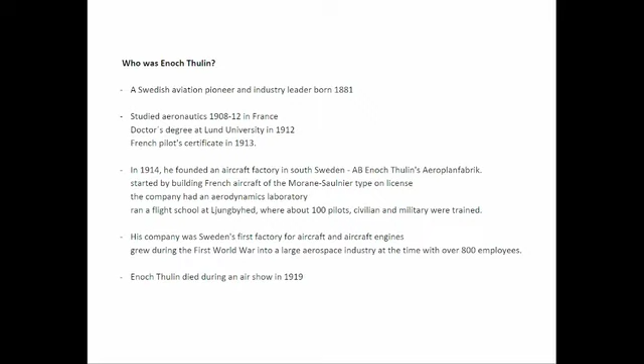And after some time, his company had about 800 employees. But then he died during an air show in 1919, and the war was over, and there was no demand for his aircraft, so his company went bankrupt very soon.

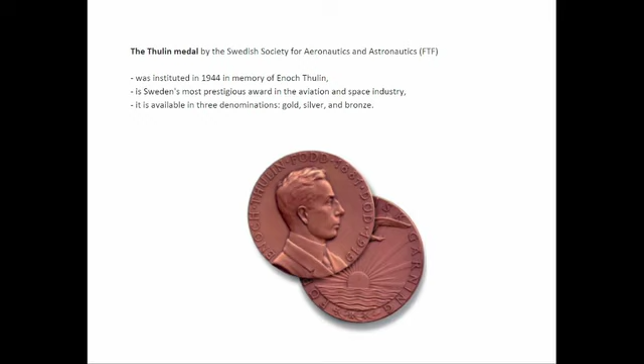But to his memory, we have the Thulin Medal by the Swedish Society of Aeronautics and Astronautics, and this medal was instituted in 1944, and it's the most prestigious award for aviation and space in Sweden. And it's available in 3 denominations: gold, silver, and bronze. So then you have the background about Enoch Thulin and why this lecture was named in his honor. Thank you.

So the ICAS Award for Innovation in Aeronautics 2022 is awarded to Professor Eli Livne from the United States of America for seminal contributions to the theory and practice of Aero-servo-elasticity in the context of aircraft multidisciplinary design optimization, and for pioneering work towards the maturation of aircraft active flutter suppression technology.

So let me tell you a little bit about Professor Livne. He is the Boeing Endowed Professor of Aeronautics and Astronautics at the William E. Boeing Department of Aeronautics and Astronautics at the University of Washington in the United States. Professor Livne holds a BSc from 1974 and an MSc from 1982 in aeronautical engineering from the Technion Israel Institute of Technology, and a PhD from 1990 in aerospace engineering from the University of California, Los Angeles.

After obtaining his undergraduate degrees, he served in the Israeli Air Force in research and development roles. And after graduating from UCLA, Professor Livne joined the faculty of the William E. Boeing Department of Aeronautics and Astronautics in 1990.

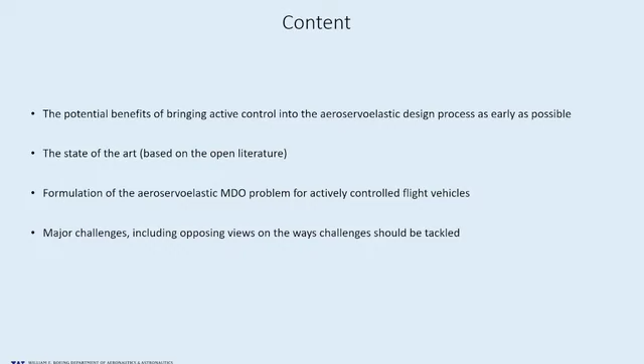So what is the goal of this talk? I want to try to convince you that it is important to bring active control to the early stages of airplane design — that while it is difficult, it is feasible, it is doable. I want to briefly talk about the state of the art, since this can be viewed as a bit of an esoteric area. I'll insert one or two short tutorials into the presentation to make sure we're all on the same page. I want to formulate the multidisciplinary design optimization problem with aeroelastic control in a general way that hopefully will serve other people developing this technology. And I'm not going to hide from you that there are some debates and disagreements about how we should proceed. So, a very short tutorial about engineering optimization.

We think about any system as a set of systems that can be parameterized and described by mathematical models. These mathematical models have parameters which determine what these systems are about, and as designers, we play with these parameters to get the systems we want. In the case of a structure, for instance, even if the material is already selected and the shape is given, we can still ask ourselves what is going to be the best structure — maybe the minimum weight or minimum cost structure that will meet all design requirements with the safety that we need. That's really the essence of the problem.

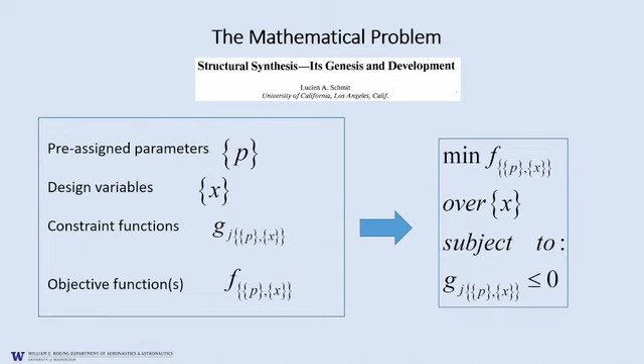Following Lucien Schmit's terminology — I have a little picture here from one of his papers about the history of structural optimization — the parameters that define these systems we're designing can be split into two: pre-assigned parameters, which we don't touch during optimization, and design variables, which we do play with. All the constraints and requirements are described by mathematical functions of these parameters — stresses in elements, buckling loads, flutter parameters, aerodynamic parameters — everything the system does can be described as some function of these design variables. We put them in a list of constraint functions that tell us what we can and cannot do to get feasible designs. Then there's the objective function: what are we trying to minimize or maximize — cost, performance? On the right is the mathematical formulation: minimize some objective function of the design variables and pre-assigned parameters over the set of possible feasible design variables, meeting all the constraint functions mentioned.

Structural optimization is about optimizing structures. You ask yourself, what is the best structure I can build that will minimize weight, minimize cost, maybe maximize reliability, subject to all the stress constraints, maybe natural frequency constraints, maybe fatigue constraints — all those limits that ensure the structure is safe.

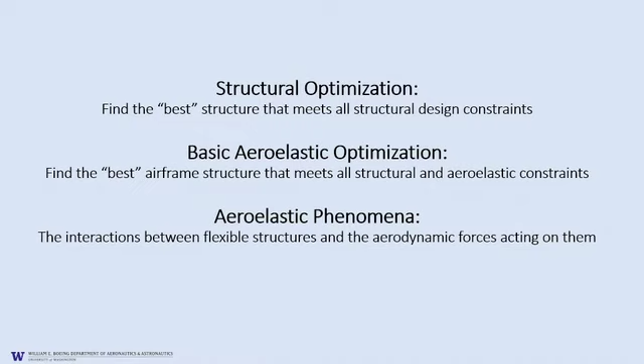Extending this to aeroelasticity - the field where structures and aerodynamic forces interact when structures are flexible and determine the forces acting on them. Now we have a problem where if we focus on the structure, we want to design a structure of minimum weight or minimum cost that will meet constraints on all the stresses and buckling loads, but also on some aeroelastic measures, such as flutter behavior, efficiency of ailerons, and things like that.

How would the pilots feel about them? How would the control system manage to work with them? So this is all the field of handling qualities. All this can be described mathematically.

Maneuver loads - these airplanes maneuver, and so you want to make sure that in all possible maneuvers, nothing fails. All the parts are within the stress limits, within the buckling limits, within the frequency limits.

Flutter is an aeroelastic instability, where as the speed or dynamic pressure go up, a kind of feedback loop can lead to unstable behavior. I'll show you an example of this in a few minutes, so I don't want to talk too much about it now.

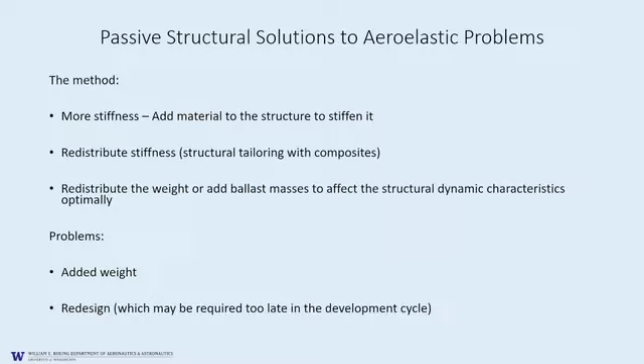If you can use composites, then maybe you don't add weight, but you can play with the fiber direction, so you can tailor the stiffness and control the stiffness distribution. You can decide to move masses, place the engines here, place the engines there. If you have no choice, you will add ballast masses, in order to solve dynamic problems. All this has been used for years, was used for years.

The problem with this is that in almost all cases, this would add significant weight to the airplane. Not to mention cases where you think you've done everything right, and now you have the prototype, and you already invested $7 billion in developing it, and something was missed, and you have an aeroelastic problem - what are you going to do? Redesign the wings, redesign the structure. So usually the penalties here will be very, very heavy when you use the passive approach.

So I would say in the 70s, definitely the early 80s, it was clear that structural optimization should be expanded to cover aeroelastic optimization. Some great airplanes of the past were designed using structural optimization with aeroelastic constraints - the X-29 forward swept wing with composites, the F-16, the Rockwell X-31. It was clear that this was the way to go.

Industry, unfortunately, does not share with us enough of what they are doing, so it's not so easy to know what the capabilities are at different companies. Lucky for us, actually, Dassault in France managed to share with us quite a bit. They were pioneers in developing aeroelastic optimization techniques going back to the 70s. Christian Petiau, a real genius of an aeroelastic designer, developed and led the development of a code named Elfini.

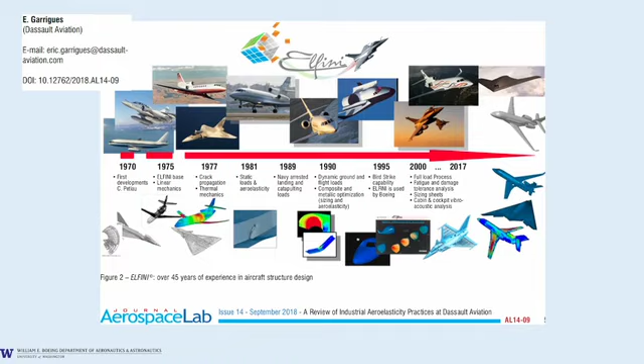So these capabilities are existent. Now, optimization has not been only attractive for structural and aeroelastic designers. Control system theorists and control system practitioners knew that it was important for them to design best control systems. You just go to Amazon and search for books on optimal control, and here you are. So the fact that you can design a control system not just to do the job, but to do the job in some best way, covering constraints and other design requirements, was very well known, and the technology is quite mature.

So it was natural to ask if we could add active control to aeroelastic systems in order to improve them. In this figure, on the bottom two blocks in blue, you can see how the flexible structure interacts with the aerodynamics in a kind of feedback loop. You apply forces, the structure deforms, the deformation changes the aerodynamic loads, this feeds back, and that can lead to all these aeroelastic problems.

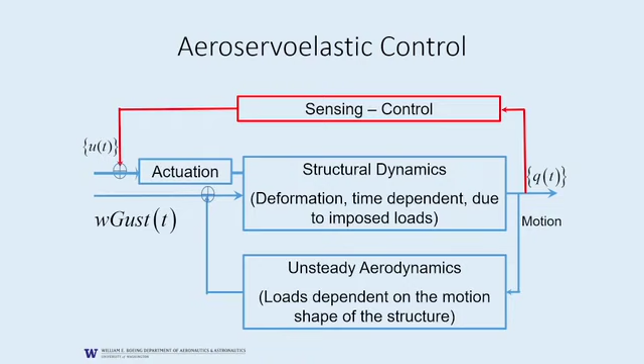And on top in red, the structure is moving in space, it's deforming. Let's place some sensors, accelerometers, strain gauges, and use the signals from these sensors that tell us what they are doing, in order to feed a controls computer that then would set commands to the actuators that would move control surfaces, and this way affect the total behavior.

So in the area of active control of aeroelastic systems, first you think of maneuver load control. Here the idea is that you will design your airplane structurally for, let's say, cruise conditions. You can see here in the broken line the perfect distribution of loads on the wing. Of course, you worry about the bending moments along the wing because that will determine the weight of the structure that you will need. But if the airplane maneuvers, pulls some G's, turns...

...these bending moments will go up unless you use the control surfaces to redistribute the load. So you can see here in the solid line how, as the airplane maneuvers, the control surfaces go up or down, and the whole distribution will change in order to keep the loads within limits so that you don't have to add the weight.

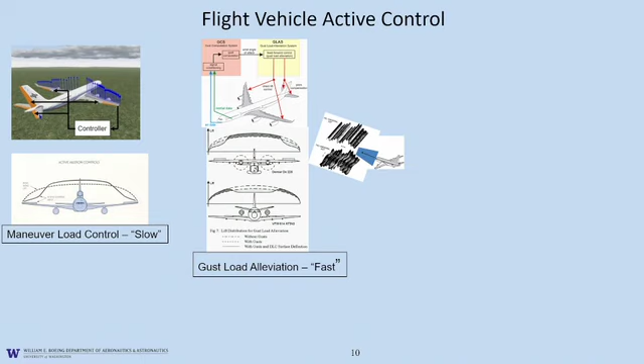As I said, we all flew through gusts. This is a daily experience for anybody who flies flexible airplanes: you hit bumpy air, and they jump, and if you look out of the windows, you see the engines moving and the wings flexing, and everybody gets very scared, except that when you know how safe they are, you shouldn't be scared. I get scared, even though I know this is safe. It helps my kids when I tell them that, but even knowing how to design them, I still get scared sometimes when the airplane shakes too much in flight.

So here again, if you have an active control system, as the airplane begins to shake, the control surfaces can move dynamically based on some control law in order to reduce this level of shaking and control the dynamic stresses and the levels of vibration. And here is ride comfort.

Well, we think about passengers in airplanes, but this is also a military problem. There's this famous story of the B-1 bomber. It was designed as a supersonic bomber for a typical mission of going very high into enemy territory and delivering its ordnance. But with the development of advanced radar systems, the mission changed, and the airplane was now required to fly at treetops, using terrain following. Imagine a heavy bomber like this, very flexible, very slender, flying in canyons and over hilltops, really shaken by very turbulent air. The crews couldn't sustain it, couldn't stand the levels of vibration. So North American Rockwell at the time, now all Boeing, installed these little two control surfaces in the front, little vanes, and with the active control system suppressed the vibrations.

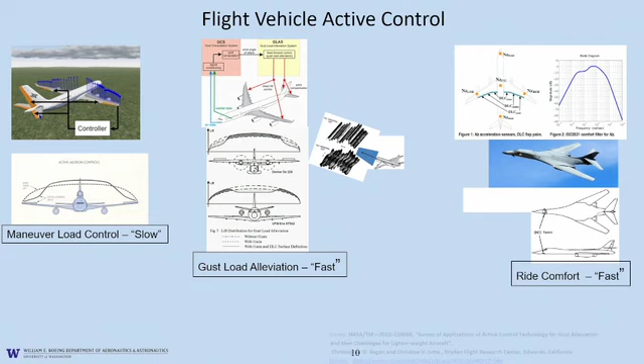I talked about the flutter problem. As I said, this is an instability. The airplane begins to fly faster and faster. That feedback you saw, as the airplane deforms in a dynamic way, changes the aerodynamic forces. The aerodynamic forces then feed back and change the load on the airplane. If you're not careful, if not designed properly, you will get unstable oscillations that can destroy an airplane in a fraction of a second.

This is a famous story from the 80s. NASA developed a special drone for aeroelastic research. It was called DAST, D-A-S-T, for Drones for Aerodynamic and Structural Testing. They had an active control system, and all the great people of the time designed control laws.

Lo and behold, in one of the tests, there was a miscommunication between people, and they programmed the wrong control law into this drone. They realized this was the case and started to slow it down, but it was too late. On inertia, the airplane was accelerating.

If you look at the figure in the center, I apologize, I imagined a screen where I'd be able to use a laser pointer. I did not imagine such a huge screen, so I will direct you just by telling you what to focus on in the slide. When you look at the center, look at the bottom, you will see the Mach number going up with time.

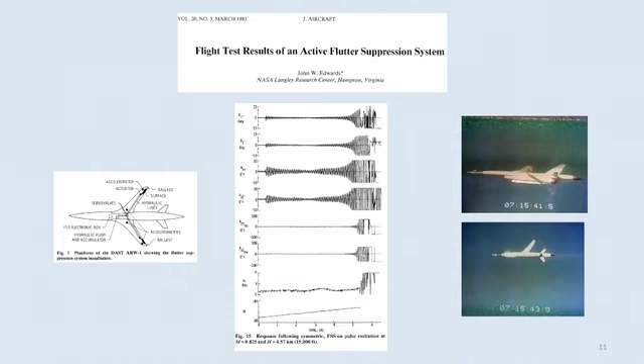As the Mach number goes up, the airplane becomes unstable. The control system tries to do something, but it's too late, and the airplane breaks into pieces in a fraction of a second. So it is a very dangerous phenomenon, and you cannot allow any airplane to ever encounter this kind of phenomenon.

The passive solution here will be stiffness and the correct mass distribution, but maybe we can use active control instead. Maybe we can control or program the control surfaces to respond to motions in a stabilizing way so that we don't have to add all the weight to the system.

So here is the story. First, you can see the flexible airplane, the deformable airplane in flight. It is driven by inputs. These inputs come from pilot commands to the actuators and from gusts in the atmosphere. It responds by moving, and it's moving around as what we call a rigid body, and it's also flexing in flight. You have a set of sensors that measure this deformation.

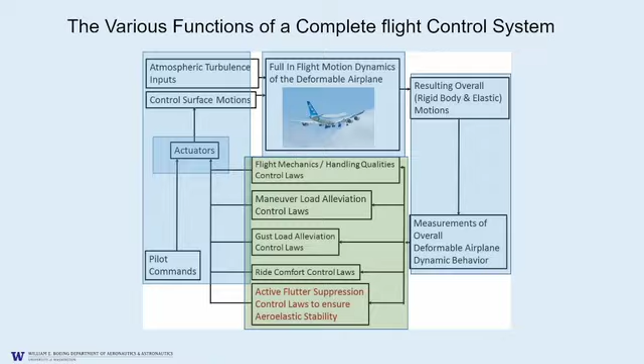They feed this information to a bunch of control laws on a controls computer, and these control computers send inputs to the actuators to close the loop and create a system that, using active control, will meet all these requirements on flutter stability, dynamic loads, ride comfort, fatigue, and so on, without having to add substantial weight to the structure.

This was already envisioned in the early 50s, but the technology was not there to do it. Late in the 60s, the US Air Force gave Boeing Wichita, when Boeing was still in Wichita, a contract to test it on a B-52 bomber.

So Boeing took a B-52 and modified it by adding control surfaces. I'm not going to go into the detail, but just looking at the figure, you can get some sense of the heavy instrumentation of these airplanes. It was equipped with more control surfaces, more sensors, controls computers.

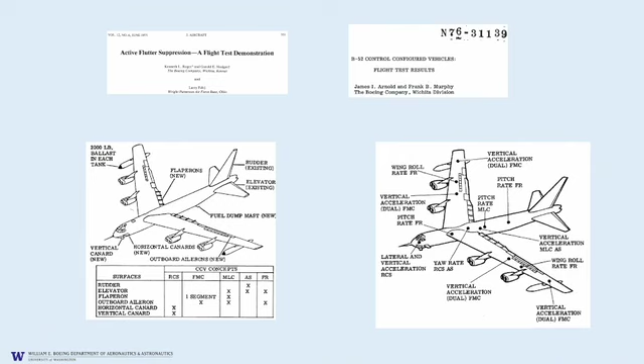What they also did, they deliberately lowered the flutter speed of the airplane. These fuel tanks that you see near the tip of the wings, they installed heavy ballast masses at the nose and deliberately made the airplane flutter at very low speeds. The goal was then to fly it beyond the flutter speed on active control and see how everything worked.

This is, I don't know if you want to call it the beauty of the beast, a phenomenal machine, very complicated, done in the early 70s. You can see in the nose area some of the added control surfaces. Boeing demonstrated that indeed the airplane could fly on active control beyond the flutter speed, meeting design requirements, just all using active control.

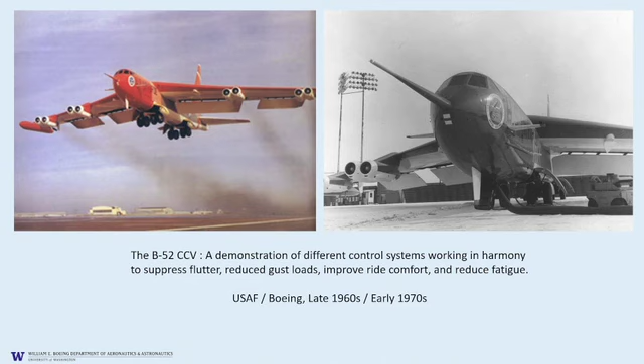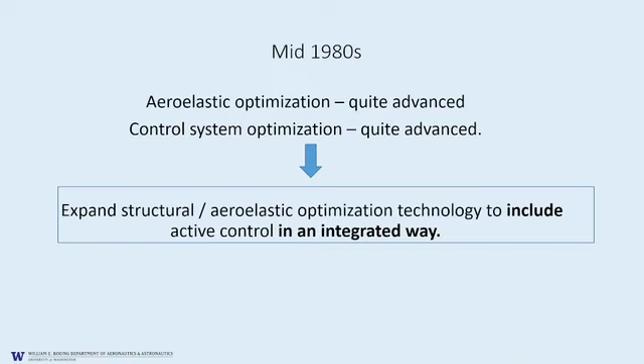So by the mid-1980s, where we were, aeroelastic optimization was quite advanced, not where it is today, but quite advanced. Of course, control system optimization was quite advanced too. So it was natural to ask, when we design an airplane, what if we integrated everything? What if instead of doing the structure separately and the control system separately, we would integrate everything into one optimization problem where everything will play together?

Before we talk about what was done in the 80s, I want to add a few notes. So far, I talked about the problem in a very analytical way. The control laws were some block diagrams, some mathematical expressions, and we talked about computers and structures. But it's not so simple. When you add a control system to an airplane, you add substantial complexity to the system. There's no free lunch in the world.

There's no free lunch in aeronautics. So we can control the airplane using a control system, but what is the price of the control system? These actuators, these computers, these data buses, all these hydraulic lines and the reservoirs, all this means weight and cost.

Without going into much detail, just to give you an impression, what you can see on the left is the architecture of the control system of the B-2 bomber. This is a quad system. Basically, there are four systems designed so that when one or two of them fail, the other ones will take over. So you will have quadruple capability in terms of actuators, computers, and things like that. That's heavy, that's complicated, that needs maintenance.

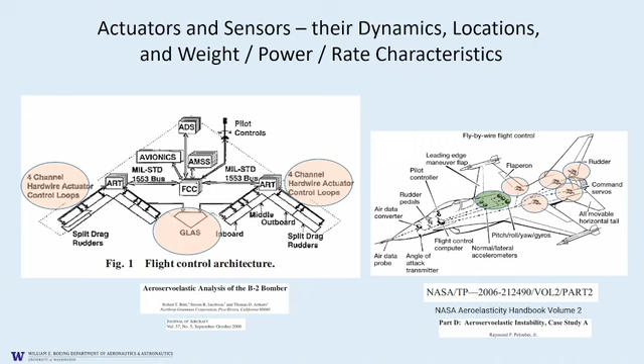The other very important question is the question of mathematical accuracy. The optimization process is a mathematical process. Every time we change the design, we have mathematical models that will tell us what happens. How do the stresses change? What is the flutter speed going to be? We have to have accurate mathematical models for the optimization process to make sense. Otherwise we'll get nonsense, and we are talking about very complex systems.

You have to capture by analysis the structural behavior, the structural dynamic behavior, the steady and unsteady aerodynamic behavior, and of course the behavior of the actuation system and the sensing system. This is not an easy job, even today.

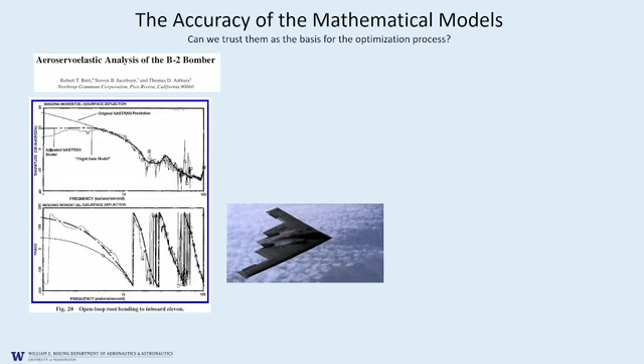Here is an example from the B-2. It's true this was done some years ago, but if you look at these diagrams on the left you can see a frequency response. This is what happens when you use the elevons to affect the bending moment of the B-2, and you change the frequency. In the low range of the frequency, the broken line is the original analytical prediction, which was completely off. Flight tests showed that they had a big error there, and they had to go back and fine-tune their mathematical models. If this were to be used for optimization, the optimization process would not lead you to the correct result.

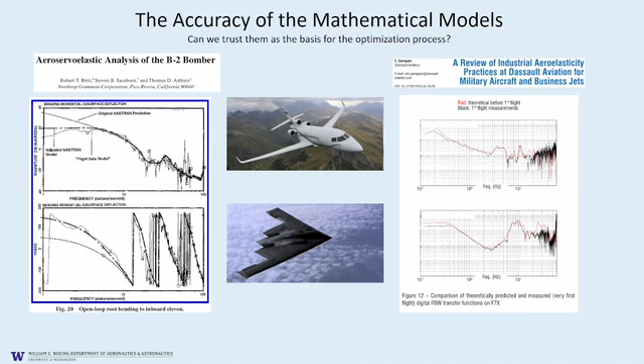So the accuracy of a mathematical model for real airplanes, and I'm talking real airplanes, not academic cases, simple cases which are all nice and lead to many papers in the journals. I'm talking about what it would take to really affect the design process in industry. You must have accurate modeling in order to do meaningful optimization.

As it happens, things kind of congealed and popped up almost simultaneously in three places. One was Terry Weisshaar at Purdue with a student, Tom Zeiler, in collaboration with NASA Langley Aeroelasticity Branch, Jerry Newsom there. They wrote a very nice paper on the idea that it was time to integrate control and aeroelastic design. But their paper was really a concept paper, and they demonstrated it using a very basic, simple example. But when you talk about doing it with mathematical capabilities that would allow you to design real airplanes, it happens in two places almost simultaneously.

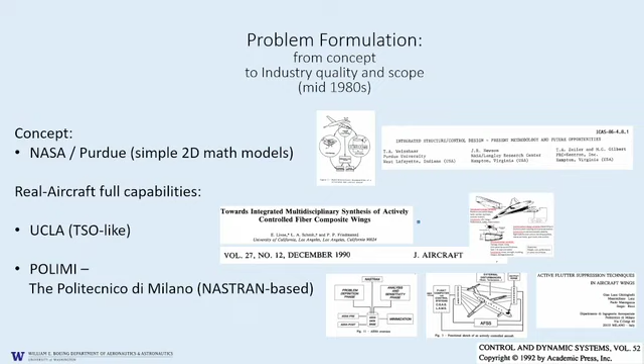At UCLA in the mid-1980s, and at the Polytechnic of Milan at about the same time. We didn't know about each other's work. I was working at UCLA with Lucian Schmit and Peretz Friedmann. I came from the Israeli Air Force. I had a lot of experience. I worked with the most advanced airplanes of the time, the F-16s and the relaxed static stability systems, the F-15s, the advanced F-4s. So I saw a lot of these aero-servo-elastic problems in practice, and I had some ideas on what should be done.

And in Milano, the great Paolo Mantegazza, with a phenomenal team of students, developed a similar capability, with some differences. What we did at UCLA in the structures area used some approximate models for wing structures that were good for fighter jets or supersonic jets, but not so good for high aspect ratio subsonic passenger airplanes. Paolo Mantegazza and his team did it right.

They used Nastran, they used finite elements. Great students, one of them, Sergio Ricci, who's here—talking about people I'm indebted to. It's been so nice to have known him since his PhD days, when we worked on the same thing, and now we're collaborating on other projects of active flutter suppression.

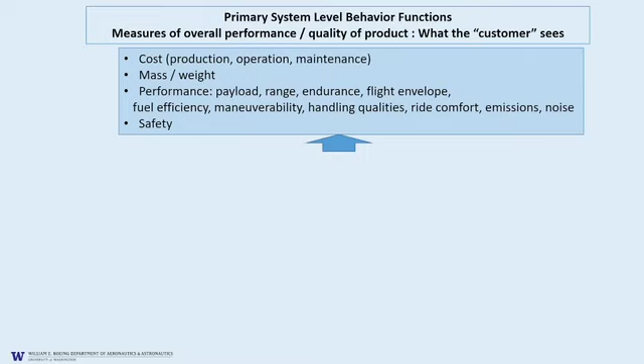So as a customer, you go buy an airplane—what do you care about? What behaviors do you care about? You care about the cost, the weight, certain performance. It's a fighter jet, you want it to perform in a certain way. You care about safety. That's what you care about. This is the highest level, where customers talk to manufacturers about the airplanes they want.

But below that, there are behavior functions—I call them secondary, but they're not less important. You have to design the airplane so these behavior functions will be under control. First, in the structure area, every part of the structure has to have stresses, in every maneuver and every load, within limits. You may have constraints on the level of twist and deformation, and on the frequencies.

Customers—say a company like Delta goes to Boeing to buy airplanes—they don't say, 'show me that this bolt in this part of the wing has a stress level below this threshold.' They really don't care about it, but the designer must care about it.

In the aerodynamic area, we care about lift and drag, any nonlinearity, buffet, and hinge moments, because the moments on the control surface determine the actuators. Again, a customer won't say the airplane must have hinge moment below a certain number, but the designer must tackle this.

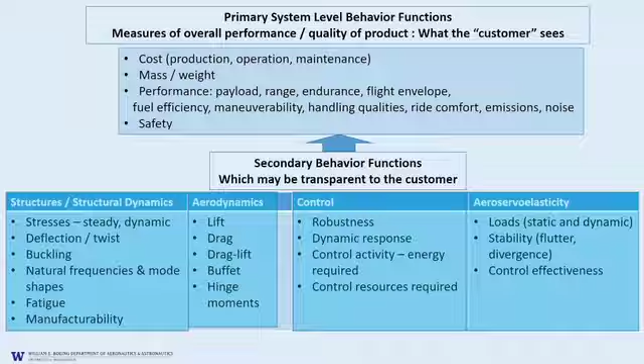In controls, similar story—we care about the robustness of the system, how it deals with uncertain situations, and the dynamic response it gives us. In aero-servo-elasticity—servo referring to controls, the traditional technical term for control mechanisms—we care about dynamic loads, flutter, and control effectiveness of the structure. So these are the behaviors that determine the constraints and the objective of the design.

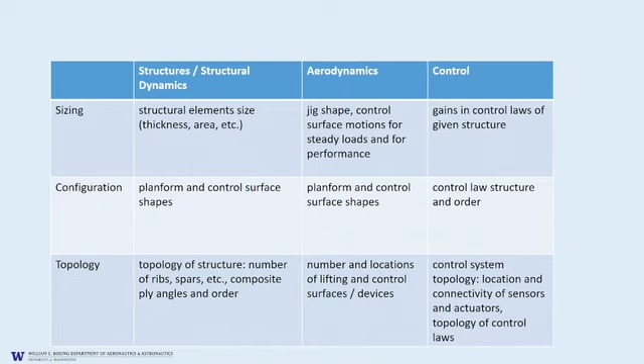On the design variable side, we have design variables coming from structures, aerodynamics, and controls, at three levels according to their complexity. At the lowest level are sizing-type design variables. So if we talk about structures... let's see, yes, it works, great—I'm very happy this PowerPoint presentation does work.

At the lowest level, you have a structure with a shape, everything connected in a particular way—you want all elements to have correct thicknesses and areas so stresses stay within limits. Going up in hierarchy, you allow the shape to change: given the loads, maybe the structure would take a different shape than you started with. At an even higher level of complexity, you have topology, where you not only play with shape and sizing but also with how elements connect points in the structure.

Much, much more difficult—same in aerodynamics. You can start with a given aerodynamic shape, but change what's called the jig shape, how you'd build it so it deforms in flight to the correct configuration. You can go higher and higher in hierarchy to play with the full shape of the airplane, and similarly for controls.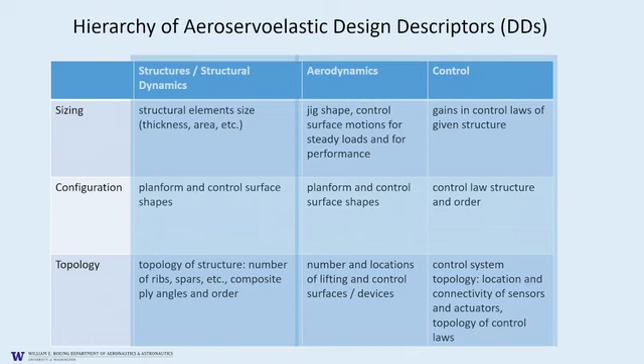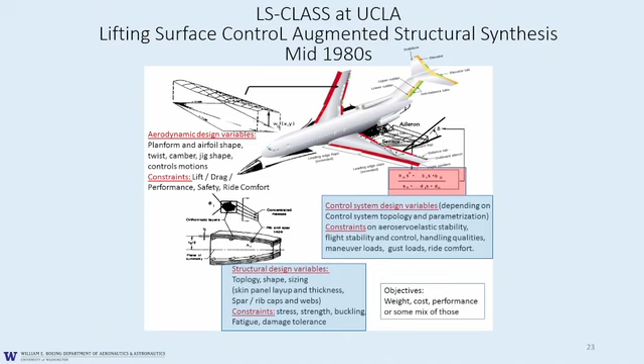So at UCLA, we created a code that could handle design variables of the sizing type. It could play with composite layers of the wing and tailor them. It could play with control laws by adjusting the coefficients of transfer functions of the control laws. And it could play with the aerodynamics by designing the jig shape of the airplane.

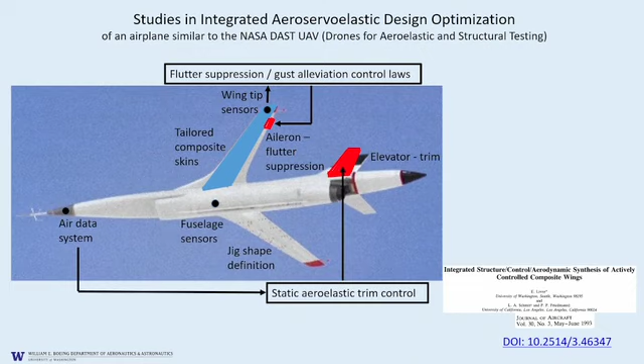An example is a drone similar to the drones I showed you, where in blue is the structure of the wings we want to design. The skins of the wings are made of composites. There are two control loops. One is below - the control loop that controls the elevator to make sure the airplane does what it needs to do for maneuvering. At the tip of the wing, you can see a sensor, a control surface, and a control law that will take care of flutter.

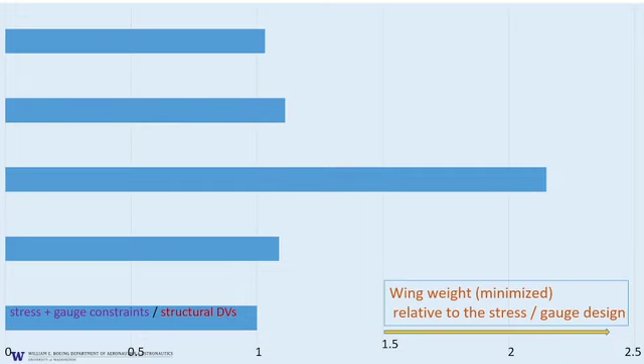And so here are some results. Everything here is normalized. What you see - the lines, the height or length of the lines - is the mass of the wing, the weight of the wing. We start with the unit: I normalize everything to the unit mass, what's called the stress design. Here are the maneuvers. Find me the best structure that would meet all the stress constraints - not flutter, not drag, just stress.

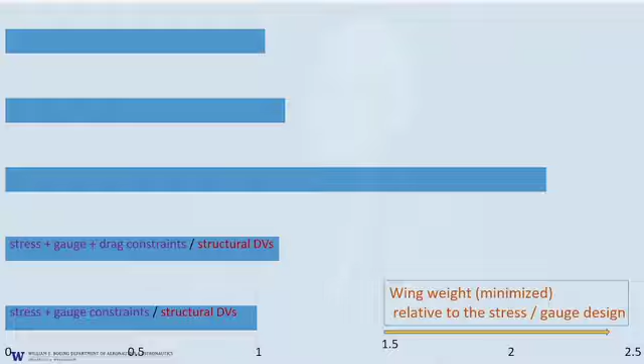Now, if we still play only with structural design variables and add some drag constraints - we say, well, that design we got, we don't like the drag, we want to reduce it by 20% - now we have to play with the jig shape. And so now we find the mass of the structure is a bit higher, maybe 10% higher.

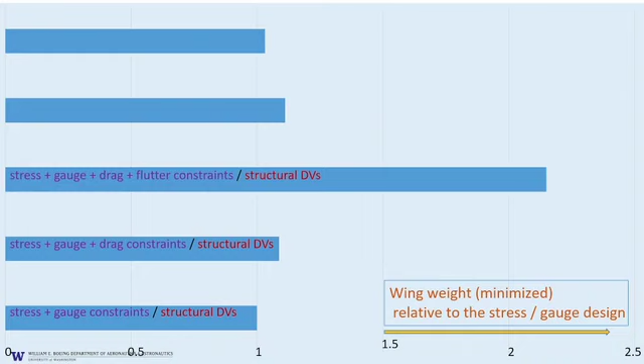But now you add a flutter constraint. The structure has to meet all the stress constraints, all the drag constraints, but also has to be flutter-free. Playing only with structural design variables, the weight jumps to more than 2 or 2.2 times the stress design weight. It's a huge, huge weight penalty.

But if you add controls, if you bring active control into the game, here we are - the weight goes down almost to the weight of the structure without the flutter constraints. And here, when we add the jig shape design variables, we're basically bringing the weight down to the stress design weight, paying no penalty for the control.

Again, this is highly simplified. To be honest, I did not include here the effect of the weight of the actuators. I should have, but I didn't.

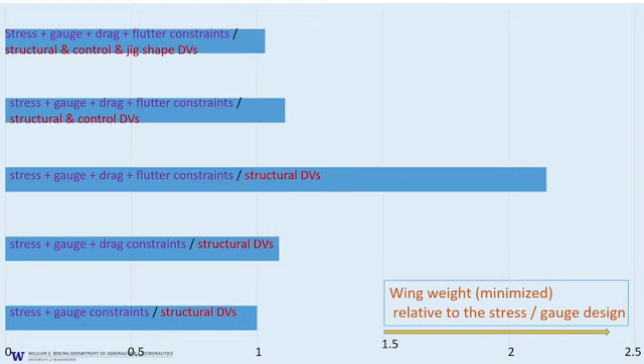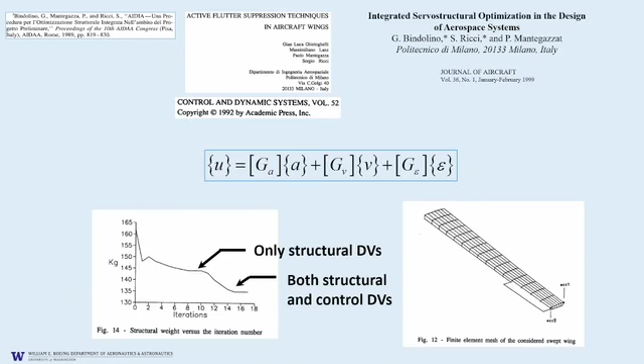And this is the work from Milano. At about the same time, they created a code named AIDIA. Here is an example - the controller is very simple, though they played later with more sophisticated controllers. You can see the iteration on a wing design where they use only structural design variables: the weight goes down to something like 145 kilograms, and then with the controls in the loop, to 135.

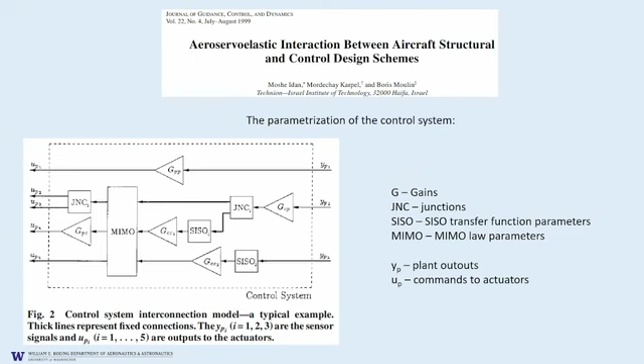This is from Moti Karpel and Moshe Idan at the Technion - a very interesting parameterization of the control law, a kind of mix of junctions where control signals meet and separate, simple gains where you just take a signal and multiply it, and also single-input single-output and multi-input multi-output - that's the SISO and MIMO blocks. Everything can then be plugged into an optimization process where you optimize the structure and the control systems.

They worked on a fighter jet in which they first optimized the structure, then activated the control system and optimized it, and then went back and fine-tuned the whole thing. So the question that was brought up is whether we should design the structure, freeze it, design the control system, then go back to the structure with the control systems, and back again - where we know how to design control systems for certain structures, and structures instead - rather than doing it in one shot.

I was always a believer in the one-shot approach, where you do everything at the same time, but I'm not sure I'm right. I'm not sure the other way isn't just as good.

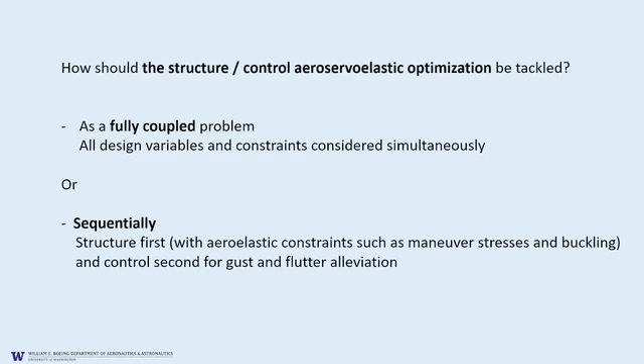Here is some work we did at the University of Washington with my student Tim Jackson. We created this multidisciplinary aero-elastic, aero-servo-elastic code using finite elements. What's special about this was that we used shape memory alloys - so we used strain actuation and articulated actuation.

And we asked ourselves whether there was a best way, an optimal way, to use both control surfaces that move part of the way in an articulated manner, and then fine-tune and create more complicated shapes using strain actuation, like piezoelectric or shape memory alloys.

My great pleasure, I sometimes get emotional about it, is that Tim Jackson is now the head of dynamics and loads for Boeing St. Louis, in charge of all military programs at Boeing St. Louis, and soon I think at Boeing in general.

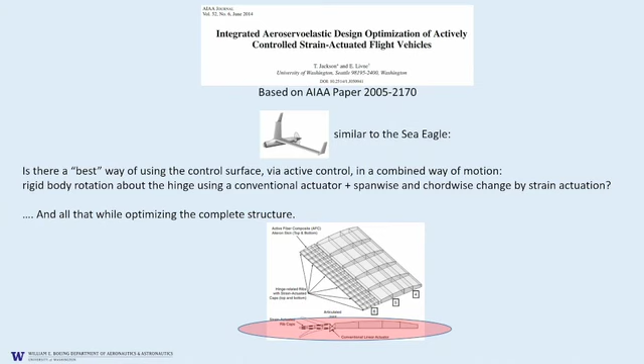Here's the control law in Tim Jackson's work. It's based, if you look at the equation at the top, these are the states in the dynamic model of the system. They describe aeroelastic states, actuation states, sensor states, gust load states, the traditional equations in state space of a dynamic system.

And the control law tries to minimize this integral at the bottom, which, if you talk about it intuitively, is a kind of a superposition of two effects. On the left is some quadratic form of the displacements and the velocities, a kind of like a mix of strain energy and kinetic energy.

And on the right is a quadratic form in the control effort, which tells you something about the control energy or the control powers that you need. And you play with these matrices, the Q and the R, in order to give certain weights to what you need.

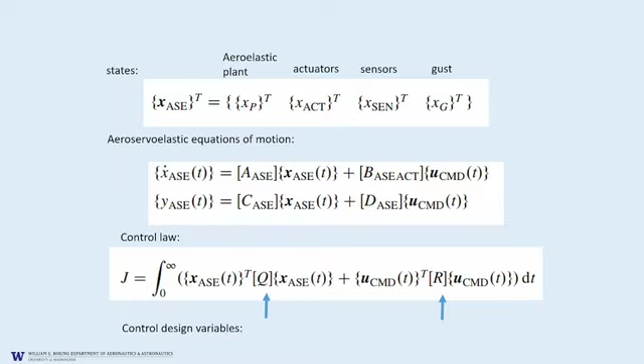Do you want to focus on minimizing the control effort, or do you want to focus on getting the response to decay as quickly as possible? We use those as design variables in this integrated design.

Phenomenal work from Bret Stanford at NASA Langley. I'm showing the results of only one paper of his, but really talking about capabilities that he developed that is industry level, that can do real airplanes. Finite elements, unsteady aerodynamics is used today in aeroelasticity, realistic models of actuators, accounting for the weight of the actuators.

So he published a number of papers. We don't have enough time to look at all of them. This is just one selection.

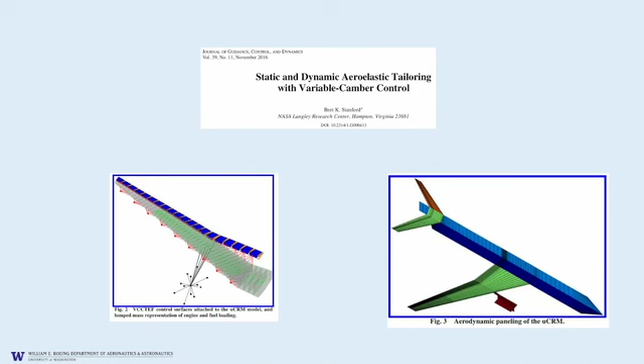This is a passenger airplane with a CRM wing. This is the common research model. This is a model that NASA and Boeing developed for CFDers, basically, to compare notes. And one of the fathers of this, two of them actually, I think John Vassberg and Rick Wahls should be here in the audience.

So don't look at the equations, look at the notes on the right. And basically, here are the constraints that Bret is accounting for.

Maneuver stresses have to be within limits, no panel buckling. Hinge moments have to be within limits to limit what the actuators have to do. Some constraints on the work of the actuators, and then some constraints on manufacturing, on the thicknesses, and also on stiffness and aspect ratio, on stiffener aspect ratio for panels.

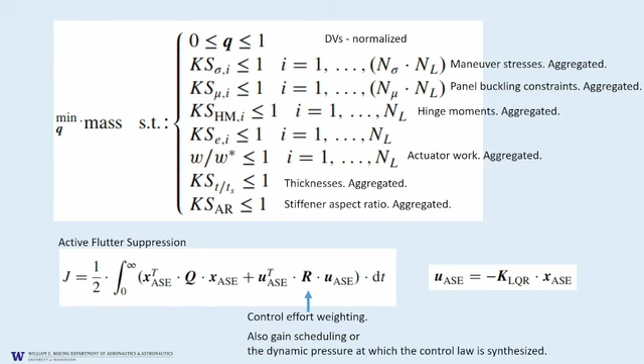And he also, for the controls, he also minimizes this quadratic measure from optimal control theory and LQR, linear quadratic regulator, the standard control theory measure of excellence, where on the right at the bottom is the control law, where the control commands are some matrix of gain times the states of the system.

This kind of work, when you look at the left, allows us to look at trade-offs that before we just couldn't look at. So for instance, if you look at the top left, and again, I don't have a laser pointer here, so I have to kind of point you by talking, directing you.

So you can see on the horizontal axis, you can see the control effort or the control energy. So the higher you are, the farther you are allowing the control system to work harder. For this is going to cost you. It will mean that you need more capable control actuators, and this will mean more weight, more power.

On the vertical axis, you can see the resulting weight of the wing accounting for the actuation and the control surface. So you see, if you do not place a limit on the control system, that is, if you allow the control system to do as much work as it wants, you can bring the weight of the wing down significantly. But the moment you begin to limit the work of the control surface, as you move left, then the resulting weight of the wing goes higher and higher and higher, because now the control system is not allowed to help you as much as it would like.

And similar results from the work at UCLA. So when you look at the figure on the right, these are three histories of an optimization where first, so what we're interested in is just the end results.

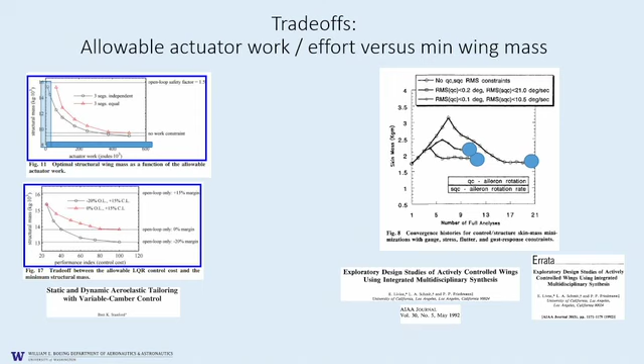So there's consistency between the results that Bret got with these very sophisticated models and the results that I had, God knows how many years ago this was. Very interesting work from Stanford, from Ilan Kroo's crew.

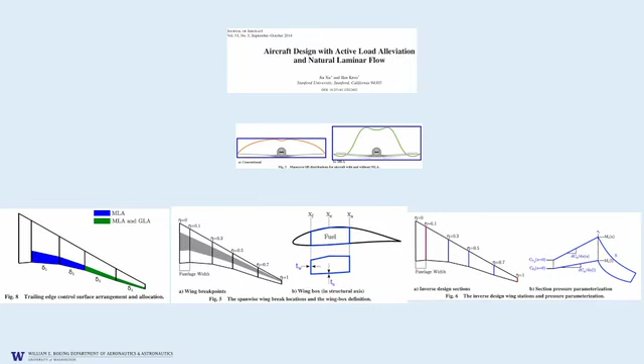Very briefly, here they are designing a natural laminar flow wing. The idea is to get as much laminar flow over the wing as possible to reduce drag by using optimization. They use maneuver load alleviation and gust load alleviation to control stresses in the structure. Their design variables, in addition to structural design variables that decide how the wing is built, also include shape design variables that determine the planform of the wing, how swept and slender it is, the shape of the airfoil, and constraints on pressure distributions to get the laminar flow you want. Beautiful work, though there's no time to talk about it in enough detail.

If you look at the figure on top, the green line tells you how much of the wing is laminar and how much is turbulent. This is all published in AIAA journals. On the left is an optimization of the wing using natural laminar flow but with no active control.

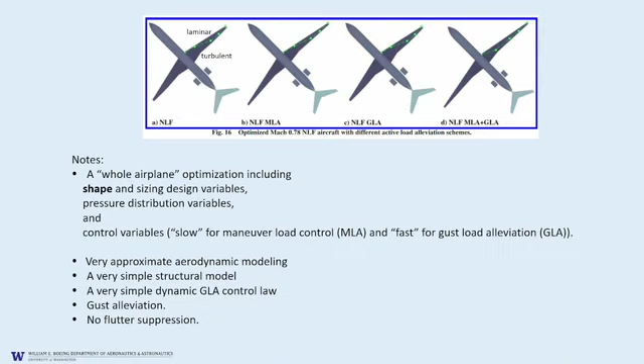On the very right is a design that also focuses on natural laminar flow, but now with maneuver load alleviation and gust load alleviation. Look what happens to the wing: a lot more of it is now covered by laminar flow. What makes this possible is that the aspect ratio of the wing becomes higher and the wing becomes narrower, the chords become smaller. A wing like this, without load alleviation and gust load alleviation, wouldn't work—you'd have to build a lot of extra weight into it structurally. But with active control, you can get this integrated multidisciplinary optimization and an effective airplane.

Now, I've just sampled a few works in this area. Unfortunately, not much has been published—I was a bit surprised when I looked at the literature. I thought I knew, and was hoping I'd missed something, but not much work of this scope has been published. I may be missing some very recent developments. But I do want to mention quickly some really nice work from Joaquim Martins and his group here at the University of Michigan, where they used robust controls to optimize a UAV. Also some work from Rafa Palacios at Imperial College, on a basic level but really addressing mathematical issues of optimization and the design space involved. And here is some recent, promising work from Airbus in France.

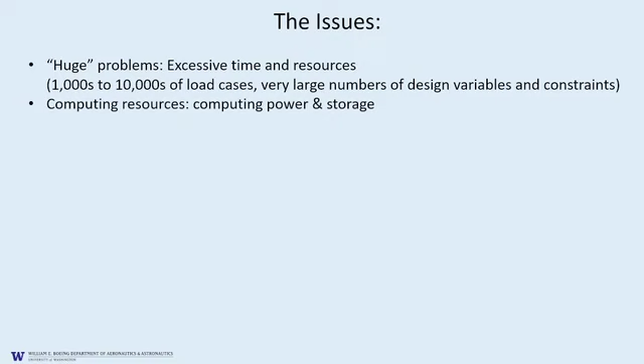So, the issues: we're talking about huge problems, a lot of design variables, a lot of constraints, very demanding. This brings up the issue of computing power and computing memory. We talk about modeling structures and aerodynamics accurately and smoothly for optimization. What controller strategy are we going to use? How do we parameterize control system designs that will work well in the integrated process? How do we design control systems that handle flutter, ride comfort, and all these other things simultaneously?

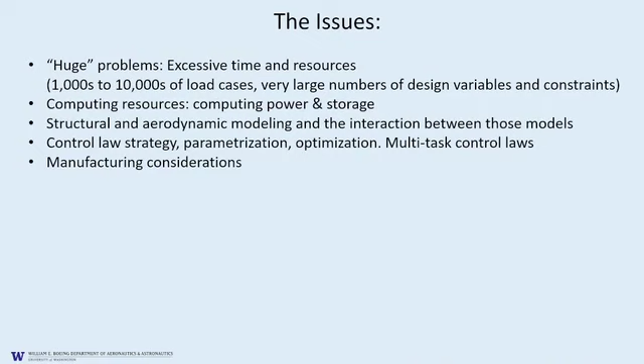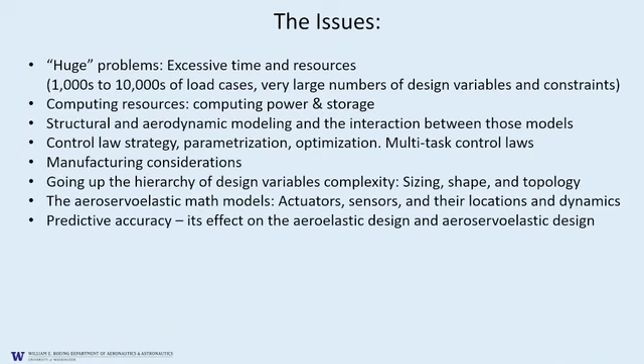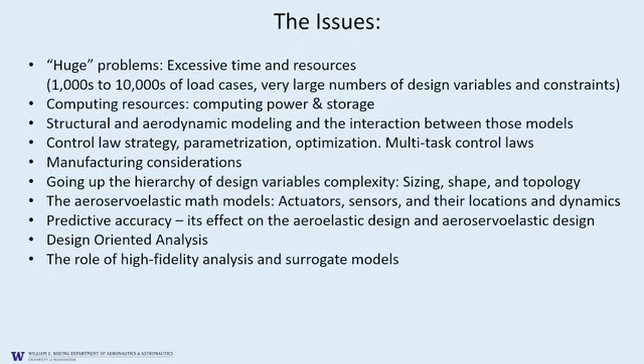Manufacturing has to be reasonably possible. What about going up in the hierarchy of design variables, from sizing type to shape type to topology? What about the math models of actuators? What about the locations of actuators on the structure? And then the predictive accuracy of the mathematical models, which are crucial if you want to do optimization. And then the design-oriented analysis that would work with the optimizer, the role of high-fidelity models and their surrogate approximations that we use for optimization, so that optimization is possible, and the big problem of uncertainty.

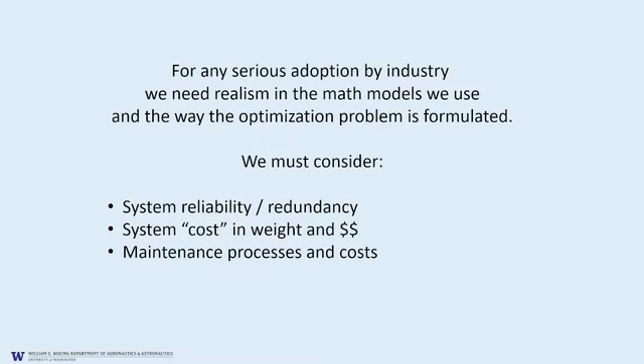So all this has to be done. If you want to make an impact on industry and how things are done, we must account for system reliability and redundancy. We must account for the actual cost of what we do in terms of weight and dollars, and actually what I missed here, also process time, in terms of how long it takes for industry to complete a design, and we have to remember maintenance costs.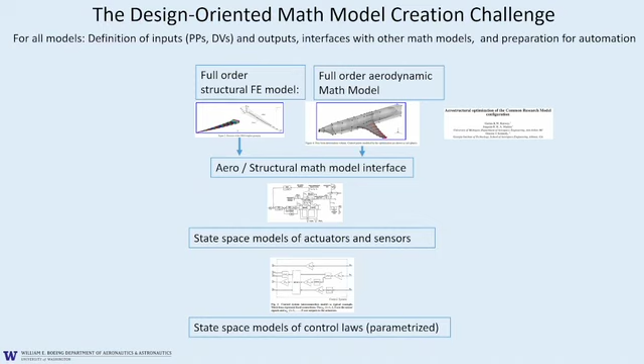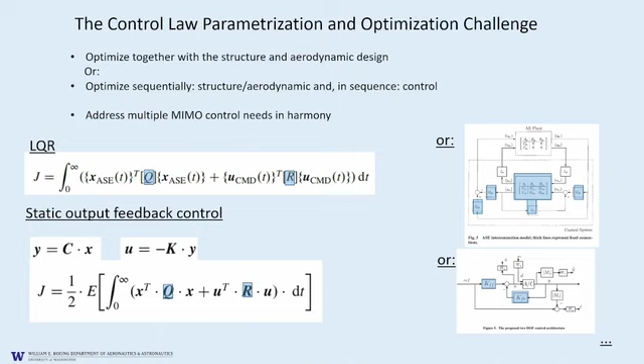At the bottom, where it's not clear yet what to do, is how do you parameterize control systems and what kind of control strategy you would use. And this is just an example of different controllers. I'm not going to talk about it in great detail. It's enough for you to look at the picture and to see how the blue squares show you parameters in the control laws that the optimization process would work with. The jury is still out. It's not clear what is the best way of doing it.

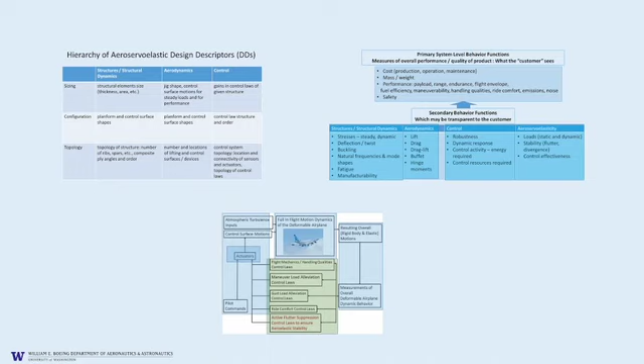Here we are. So this is the problems we are facing. The design variables at their very different levels, the behavior functions, which represent the constraints and the objectives, and the mathematical model, which covers the airplane, all its systems, which have to meet all the constraints.

So in this integrated aero-servo-elastic optimization, if we compare it to just aero-elastic optimization, and this is back to the Dassault figure, where are we? This is the Dassault figure. It shows you the development of aero-elastic optimization from the 70s until now. So in our area, where are we about here? Are we about here? I don't know. We are definitely not there. We are definitely not where we should be.

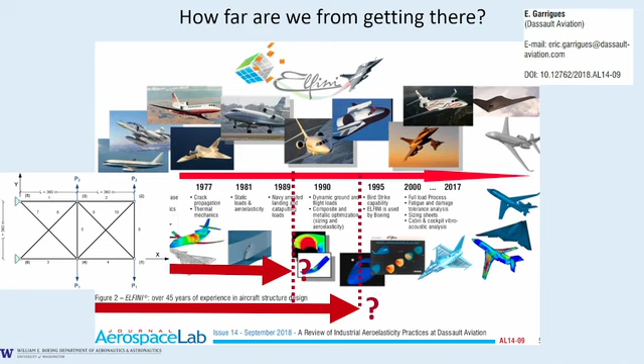Just at the same time, no need for despair. I truly believe that what I have outlined is possible and achievable, and it's just a matter of time. Remember, the structural optimization started with a truss structure, the 10-bar truss on the left, and ended with a high-speed civil transport configuration some years later. So I'm confident that what I'm outlining here is doable.

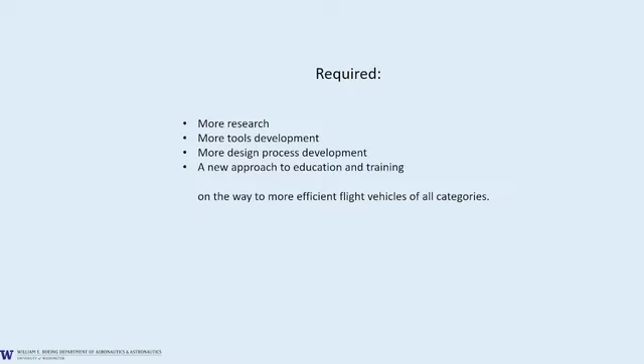What needs to be done is just more research, more tools development, more design process development because of the integrated nature of the problem. And very important, actually I had slides about it, except that the time limit here prevents me from using them. And I know you're happy. We're going to finish it on time.

Education. Multidisciplinary education in aeronautics is more and more important. The systems get complicated. It's really important that we educate students who are at home with structures, aerodynamics, controls, airplane design, and aero-elasticity. At the University of Washington, we have a special master's track. This was actually developed because of a request by Boeing. Our first graduate was my master's student, Allison, who is now working for Boeing Dynamics and Loads. And I think that every university should consider something like this to make sure that we send students into the world who are at home with the complexity of the systems that we are designing.